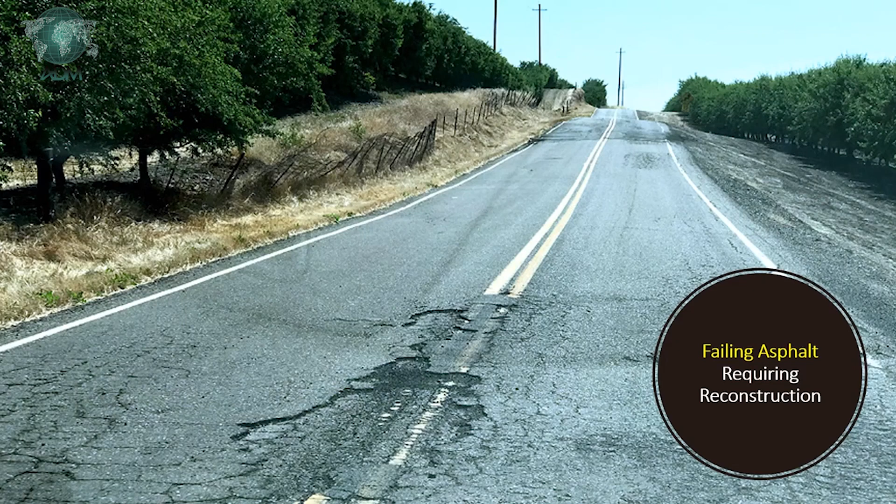I'm sure you've observed that much of our country's roadways are falling apart. You likely have failing roads in your own community. Roads across the country look and drive like the one shown. The truth is that most road departments, whether they be state, county, or city, are dealing with too many failing roads for their budgets to maintain.

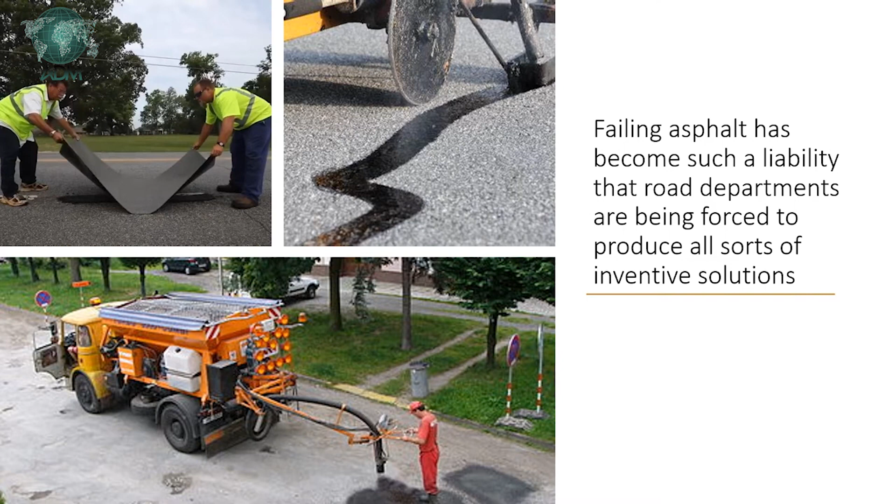In fact, America's roadways are so poor that the American Society of Civil Engineers has scored the U.S. infrastructure with a D. Failing asphalt has become such a liability that road departments are being forced to produce all sorts of inventive solutions to deal with potholes, cracks, and other types of failures.

Prior to LithTec, road departments have had two options to replace their failing asphalt. The first option is called unpaving. Unpaving is literally returning asphalt roads into dirt roads. Unpaving results in poor drive quality, regular maintenance that can cost as much as $12,000 per mile per year. It requires reconstruction due to loss of base course every 3 to 5 years, and when weather conditions are poor, it results in unsafe driving conditions.

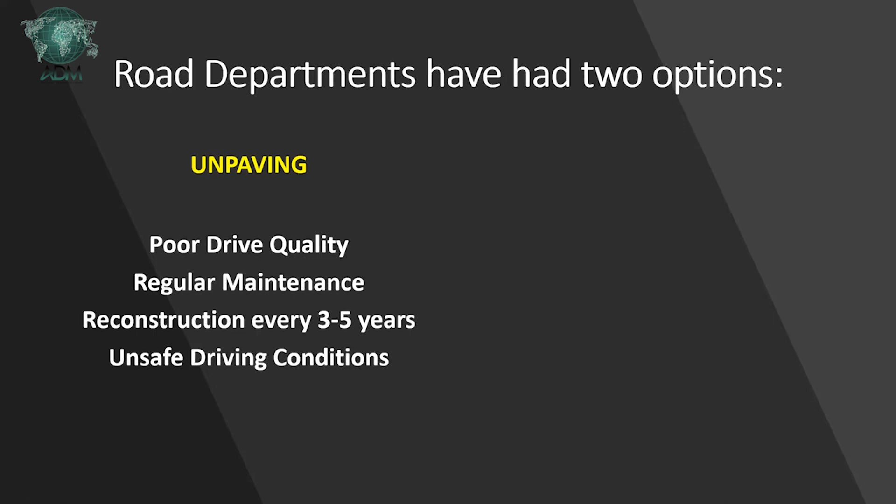Due to limited budgets, unpaving conferences are being held across the nation in an effort to turn asphalt roadways back to gravel roadways. At Lithified Technologies, we believe that unpaving is simply not good enough, and is one of the reasons we've developed LithTec. The second option is asphalt reconstruction.

Asphalt reconstruction has excellent drive quality, very similar to a LithTec roadway. In fact, there are a few examples of a LithTec roadway that turns directly into an asphalt roadway, and drivers are unable to tell any drive quality difference. However, unlike a LithTec roadway, maintenance can be very expensive due to potholing and various types of road fatigue.

Reconstruction can cost as much as $1.2 million to $1.5 million per mile, which is simply too expensive for counties to fit in their limited budgets. This results in counties having more and more failing asphalt to fix each year because they are unable to reconstruct enough miles per year to make up any ground. In addition, asphalt reconstruction has severe environmental impact as it requires large quantities of materials.

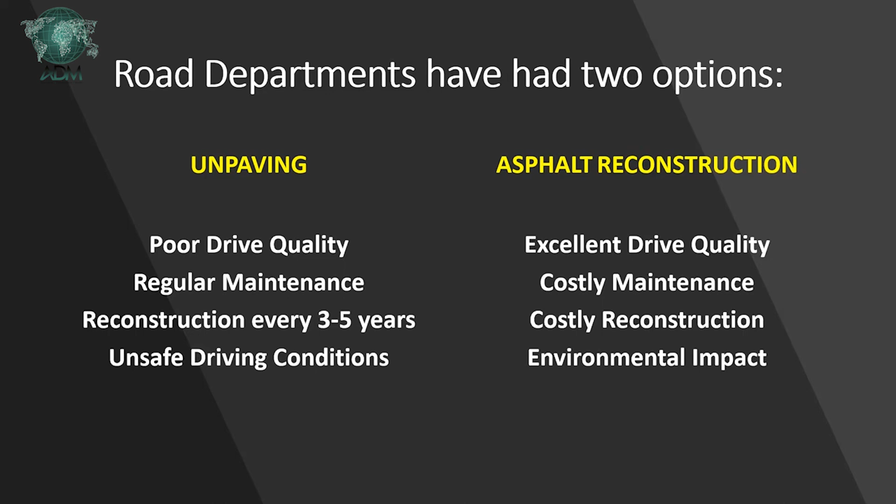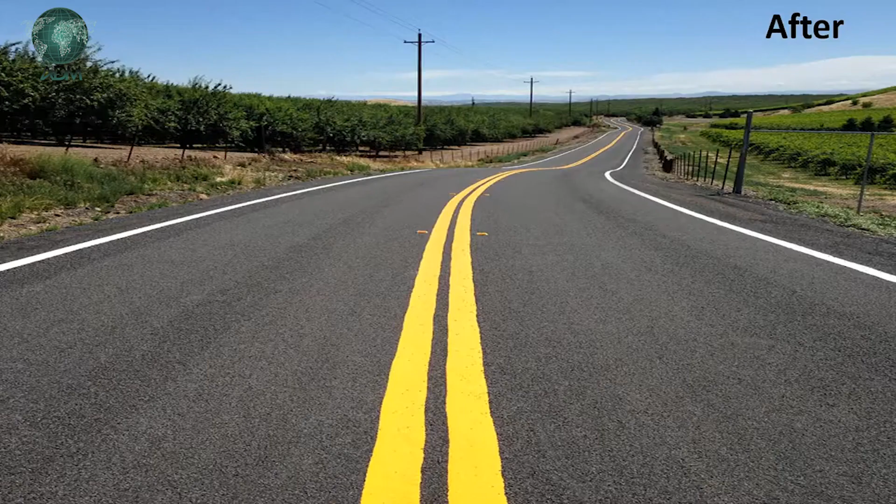At Lithified Technologies, we have made it our mission to provide road departments a third option, a better option, a roadway with asphalt performance that fits in the budget. And that's exactly what we have done. Remember the failing asphalt road I showed you previously? Here it is before a LithTec installation. And here it is after, with a LithTec road foundation and a double chip seal surface striped and finished.

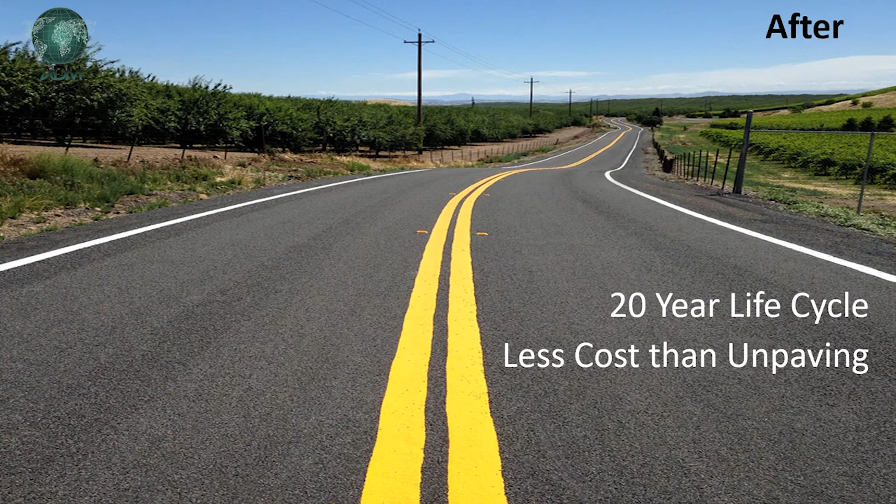This road is a county road built for heavy hauling for a 20-year life cycle. The roadway shown here will cost less than unpaving due to reduced maintenance with far greater drive quality, and will cost as little as 25% of the cost of asphalt reconstruction, allowing counties to construct at least 4 times the miles per year. Achieving 4 times the miles per year for any road department is a big deal. You might be wondering, how is this accomplished? So let's get right into it.

At Lithified Technologies, we have spent the last 8 years developing a technology that we believe will lead to a paradigm shift in the way that road departments choose to build roads. You're probably aware of a natural occurrence called lithification, which is a process involving minerals, moisture, and pressure that combine to form complex aluminosilicates, thereby gradually turning soil into stone over thousands of years.

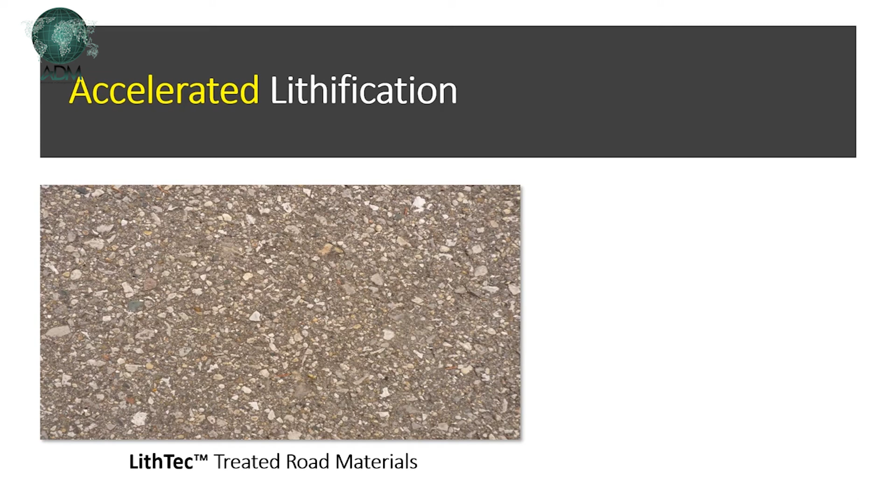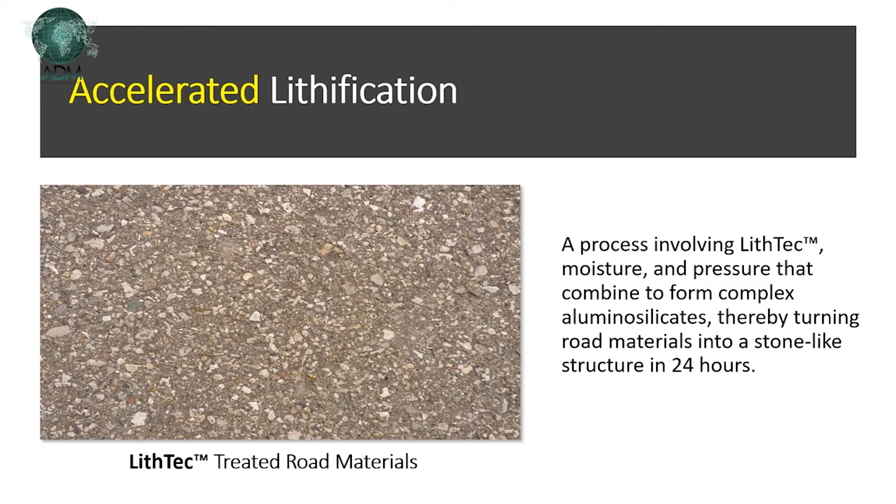LithTec is a breakthrough technology that capitalizes on the natural occurrence of rock formation, but in a faster package. LithTec is able to accomplish accelerated lithification, which is a process involving LithTec, moisture, and pressure that combine to form complex aluminosilicates, thereby turning road materials into a stone-like structure in 24 hours. Accelerated lithification is achieved using LithTec. If you had any questions about precisely what LithTec is, here is a brief summary.

LithTec formulations are dry cementitious blends of traditional elements, along with a proprietary blend with premium components that are uniquely processed. LithTec is blended regionally and is available for shipment across the entirety of the U.S. LithTec is customized for every project to optimize your previously purchased failing roadway materials into a base lift with the highest structural performance achievable. LithTec is safe and easy to install and was designed to plug and play with traditional road construction specifications.

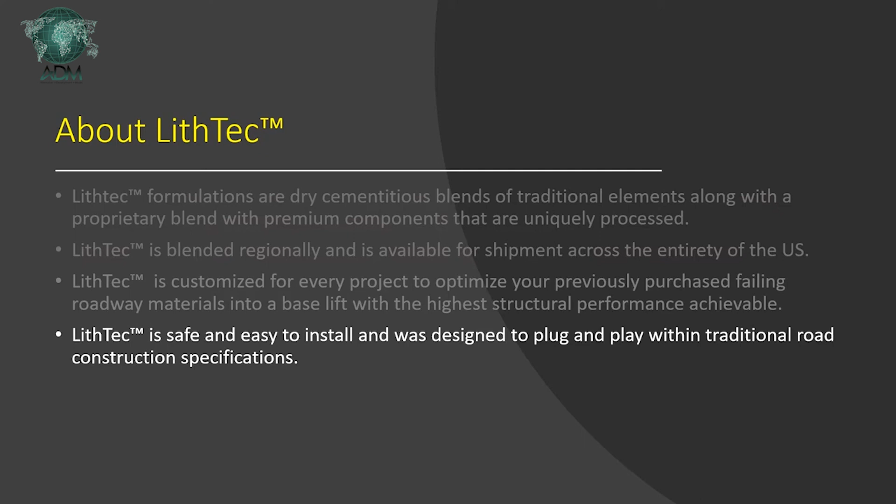Here is a summary of the performance advantages provided through the incorporation of Lithification. Unlike traditional stabilized bases, a LithTec base is capable of sustaining unconfined compressive strengths from 400 psi to 800 psi. This is made possible by LithTec's increased ductility, increased density, reduced porosity, and overall lift matrix characteristics.

Increased strength capabilities correlate to increased stiffness. LithTec often provides resilient modulus values from 500,000 psi up to 2.5 million psi. Due to these values, third-party engineers classify a LithTec base as a semi-rigid pavement with structural numbers up to 0.44.

The result is a base lift that can sustain reduced pavement thickness designs. Ultimately, this creates the opportunity for cost-effective, long-lasting chip seal roadways and reduced asphalt roadways to be constructed in the place of traditional options. LithTec also reduces permeability and porosity, which reduces capillary action, water penetration, and softening due to flooding.

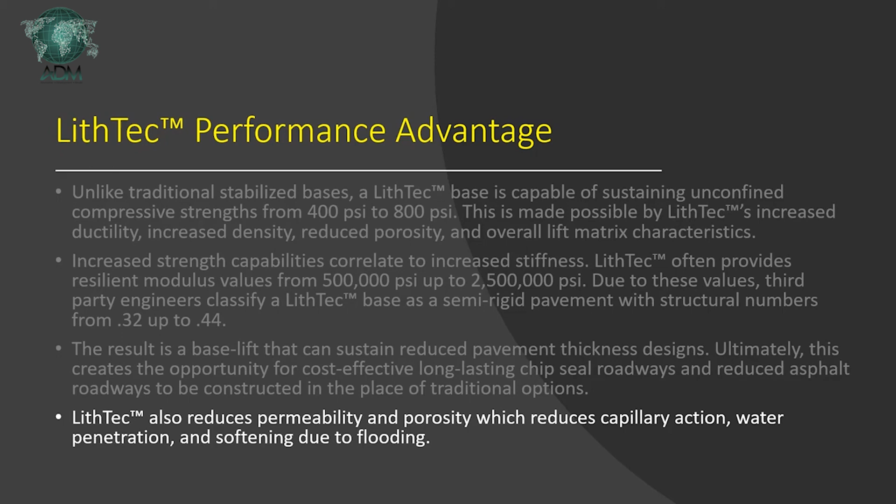To try and help explain how LithTec's performance advantages improve roads, take a look at this illustration. Here is a traditional asphalt construction with a granular base or base course. Base course is unbound, has low stiffness, and is easily degraded by concentrated stress shown here, which results in something you are probably very familiar with: potholes.

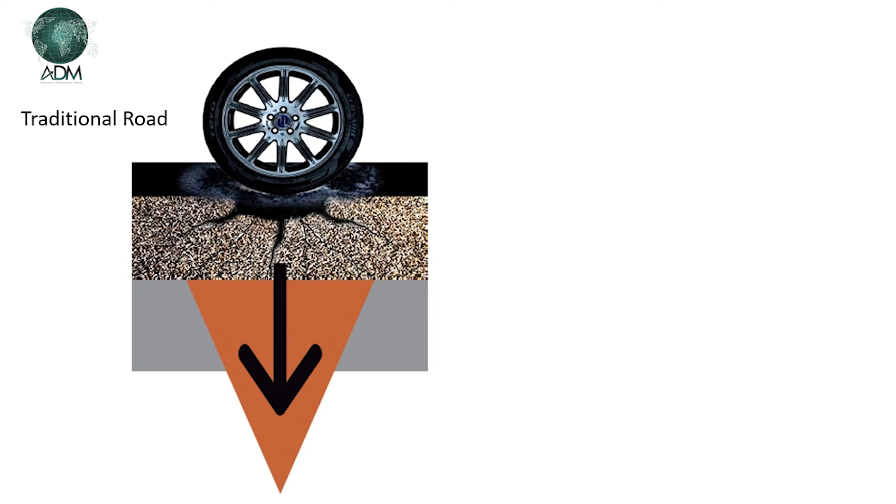A LithTec base provides a bound, uniform, high-stiffness base lift that results in a semi-rigid pavement-like base that distributes the stress, resulting in a long-lasting road with greatly reduced risk of surface failure.

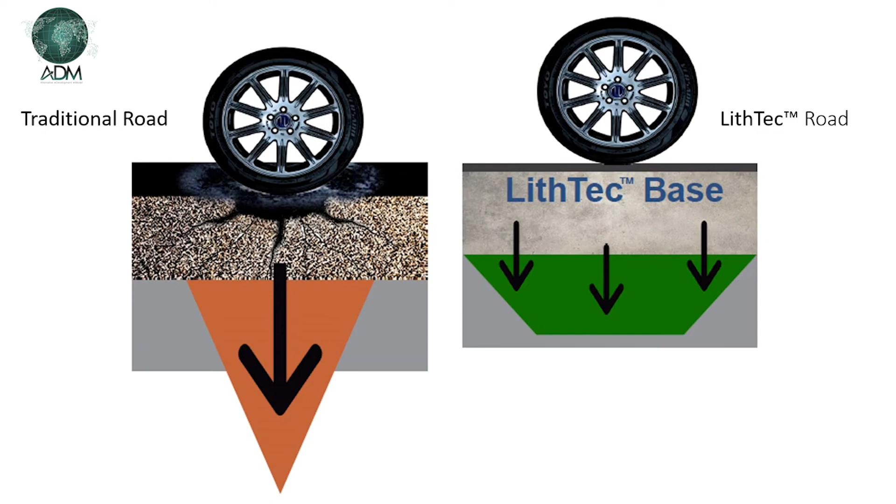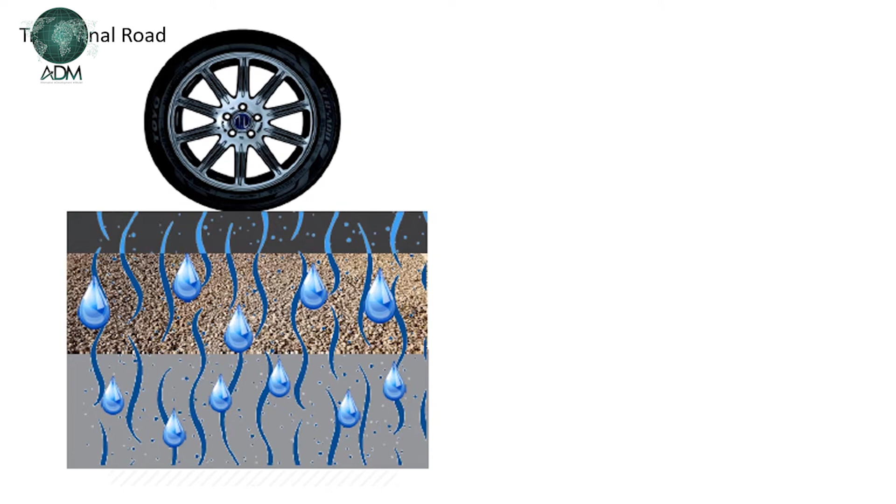Traditional granular base, or base course, is susceptible to high water tables, capillary action, and flooding. Water infiltration will result in softening and poor performance under harsh freeze-thaw conditions, which lead to failure. A LithTec base reduces permeability, helps keep moisture out, remains bound in flood conditions, and reduces porosity, resulting in excellent performance under freeze-thaw conditions.

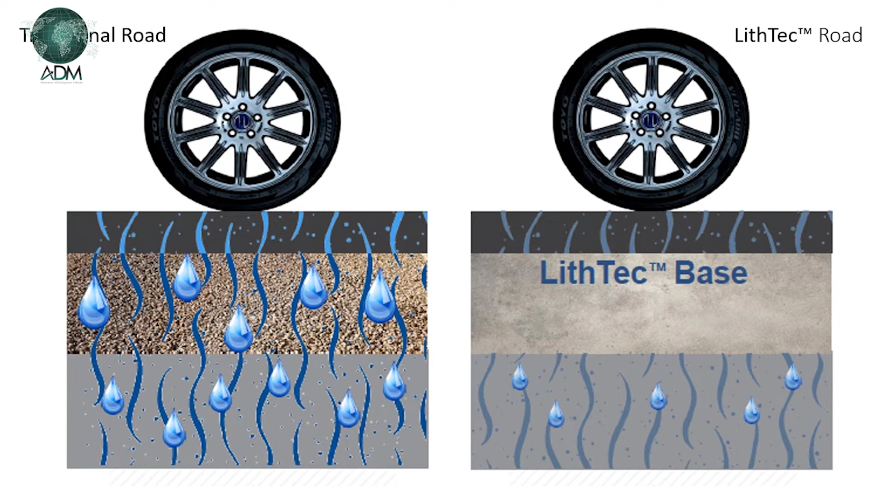LithTec is not simply a breakthrough product. It is also a new way of looking at building roads. Included with your LithTec product purchase, Lithified Technologies provides a responsible road building system by combining LithTec product with included services that support our clients' ensured success. Lithified Technologies provides a great deal of support, and those benefits are provided in stages.

Stage 1 is geotechnical sampling. Geotechnical sampling involves Lithified Technologies field supervisors traveling to your roadway. They will measure the road size, elevations, and evaluate on-site road materials, collecting samples at cross-sections shown here in red, and documenting circumstantial conditions. Field supervisors then send the materials sampled back to Lithified Technologies' geotechnical lab.

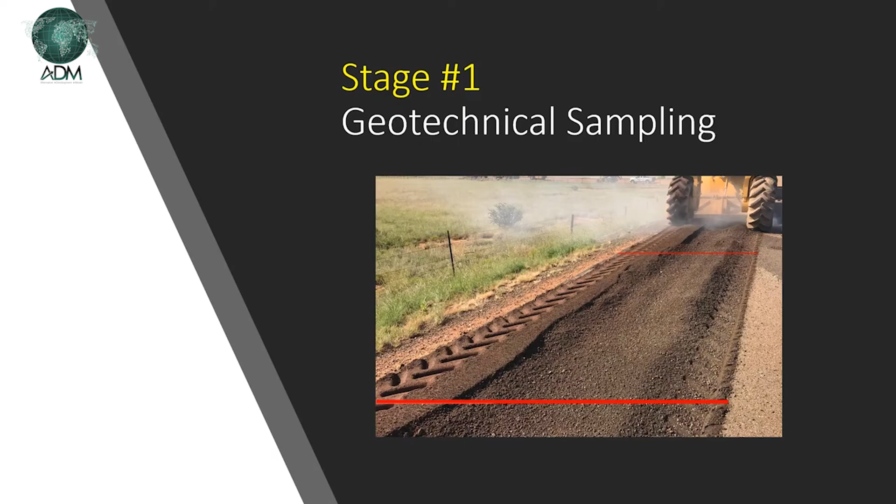Stage 2 involves Lithified geotechnical experts analyzing the road materials sampled on your roadway and completing a proprietary process that allows our geotechs to deliver a customized product with the precise chemistry required to optimize your road performance and road life cycle.

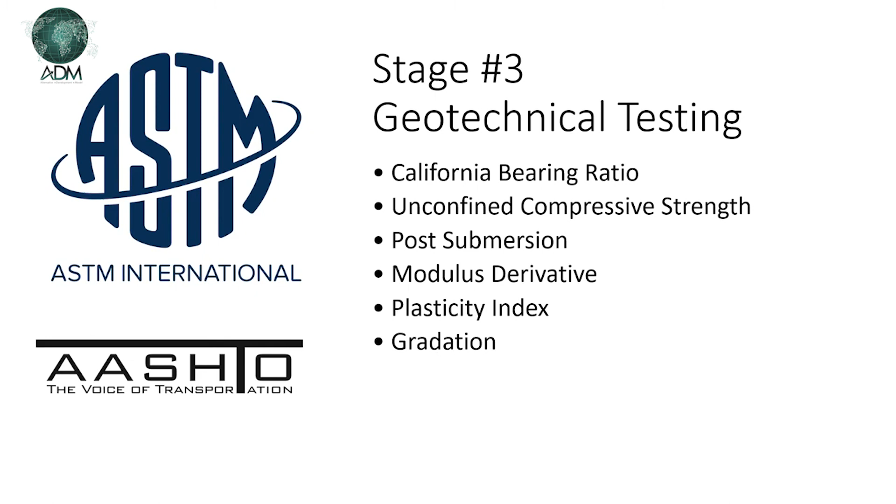Stage 3 involves Lithified Technologies geotechs testing your customized product performance in your roadway materials. Testing includes California bearing ratio, unconfined compressive strength post-submersion, modulus derivative, plasticity index, gradation, dispersion, and shrink swell testing. By testing the road materials with and without LithTec and through many forms of ASTM-compliant testing, Lithified Technologies is able to provide optimal dosage and ensure the structural performance is being achieved to meet the needs of your project.

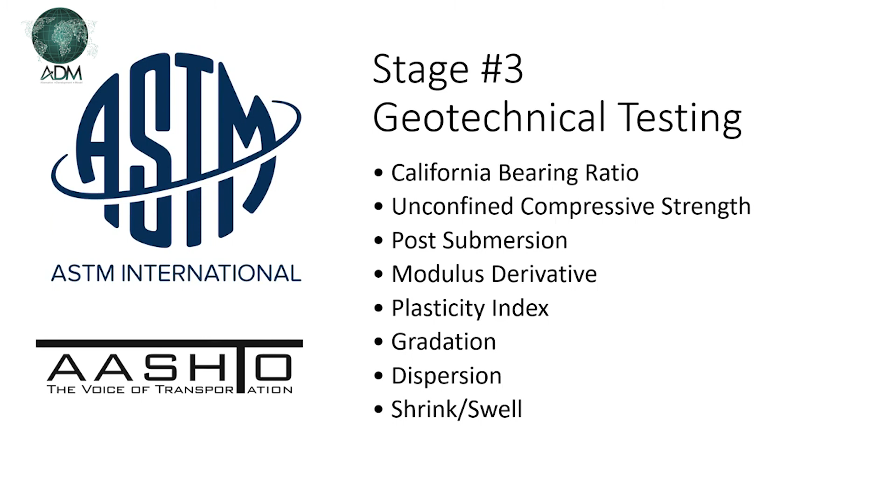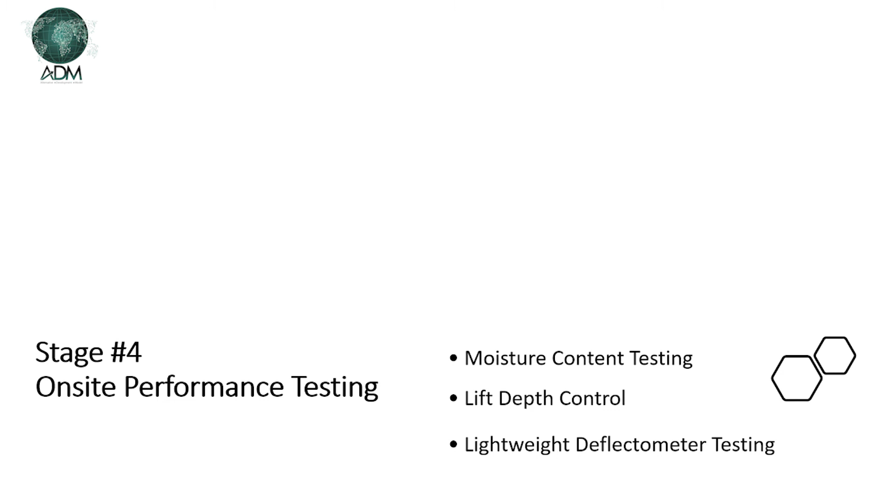Stage 4 includes on-site performance testing during installation. Lithified Technologies field supervisors are sent to your project to assist with moisture control, depth of lift control, and to perform lightweight deflectometer stiffness testing. The lightweight deflectometer testing will be performed at 4-hour and 24-hour segments to ensure that the results being achieved in the field correlate to the results that were achieved in the lab.

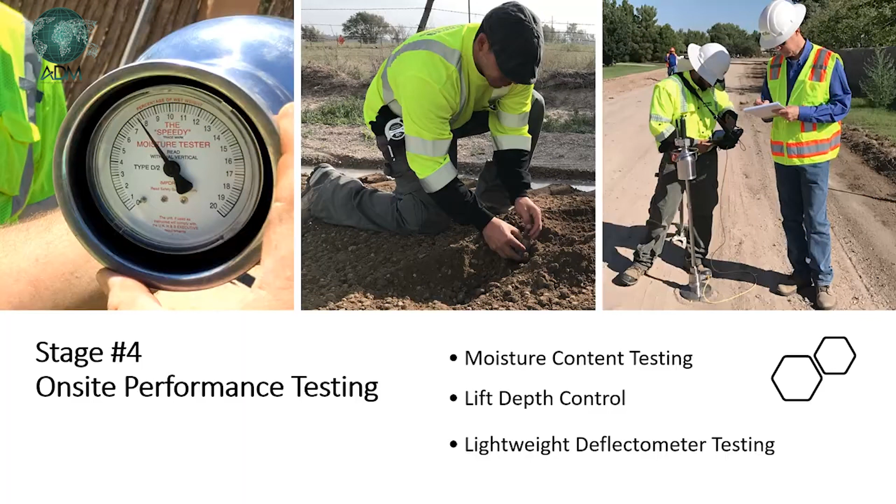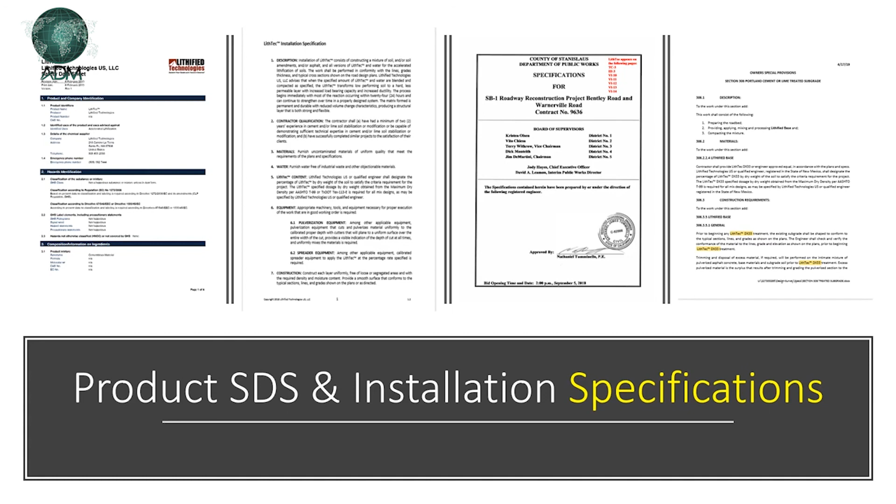LithTec has been included in county installation specifications across the country and is a proven technology with substantial testimonials to help support and build your trust. Los Alamos National Laboratory, otherwise known as LANL, which is the most preeminent scientific laboratory in the world, just completed a 38-page white paper on LithTec and its performance.

They focused on four main attributes: bonding of base materials, unconfined compressive strength and tensile strength, consistency of strength gains, and strength gains across various soil types. They concluded that the combination of these four attributes for the LithTec samples suggests that they are potentially ideal materials for the construction of flexible surface and base layer pavements that can be optimized for local conditions.

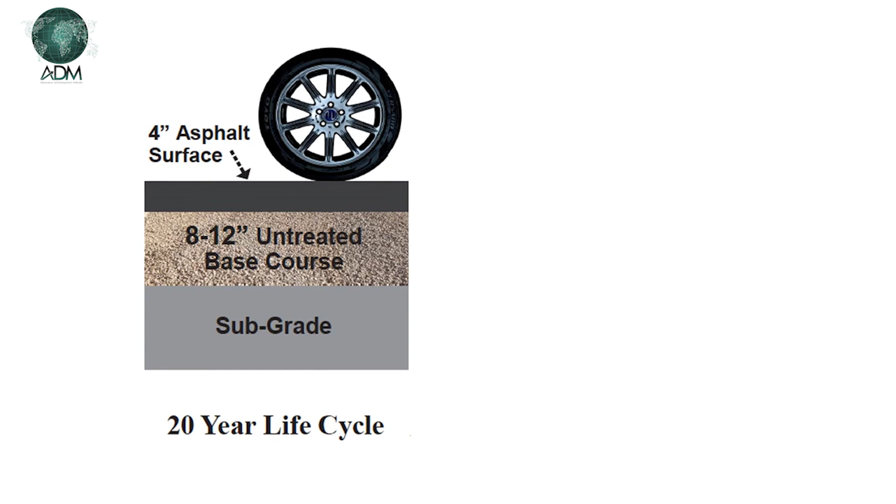Here is an engineered design for a double chip seal supported with a 6-inch LithTec base. Also engineered for a 20-year life cycle. So here is where the rubber meets the road. Traditional asphalt construction costs approximately $1.2 million per mile, while a LithTec base lift with a double chip seal can be constructed for $250,000 per mile. That's a $950,000 savings per mile for the same 20-year life cycle.

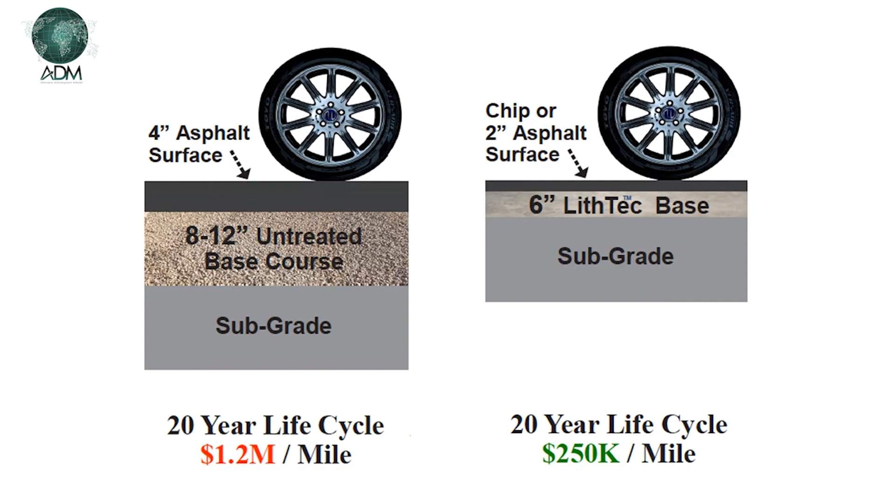Reflective cracking occurs when the base is installed without addressing underlying problems and/or weak spots. LithTec, in concert with the services provided, sampling, product customization, geotechnical testing, and on-site performance testing, were designed to ensure that the risk of weak spots are minimized and thus the risk of reflective cracking is greatly reduced.

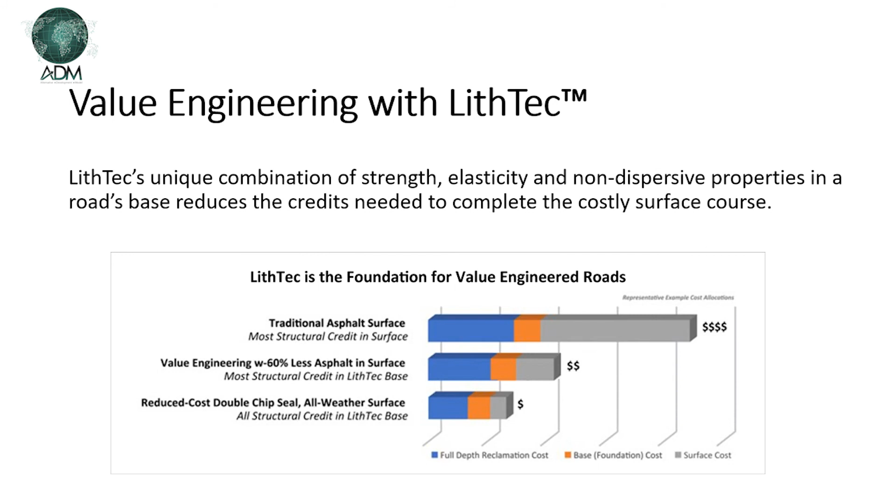You can apply structural credits to the LithTec base, thereby reducing the surface course credits required. In this example, the asphalt is reduced by 60%, and this reduces the overall cost by 37.5%. Costs can be reduced further by utilizing a double pen chip seal for an all-weather asphalt performance road. In this case, the savings in comparison to traditional asphalt reconstruction is 75%. This allows counties to build 4 times the roadway per year.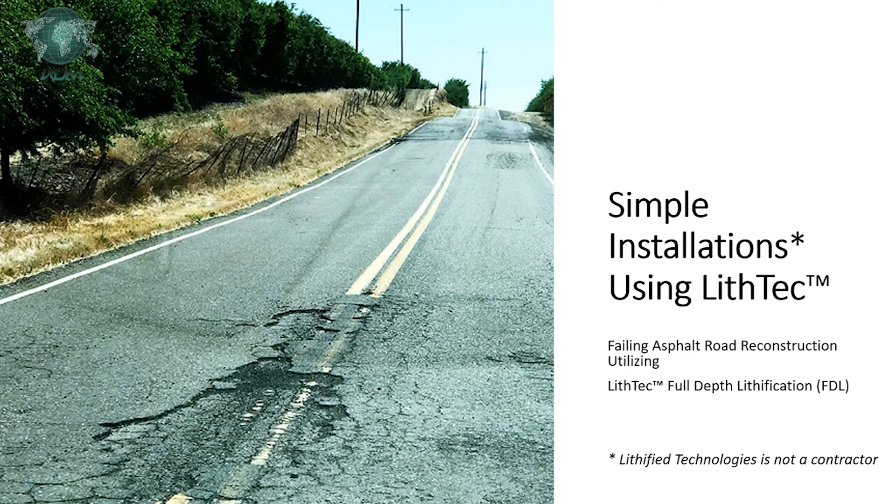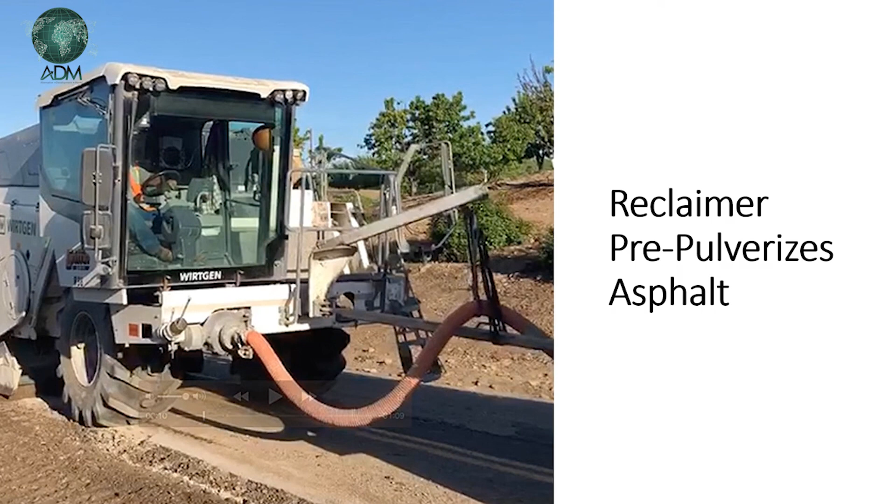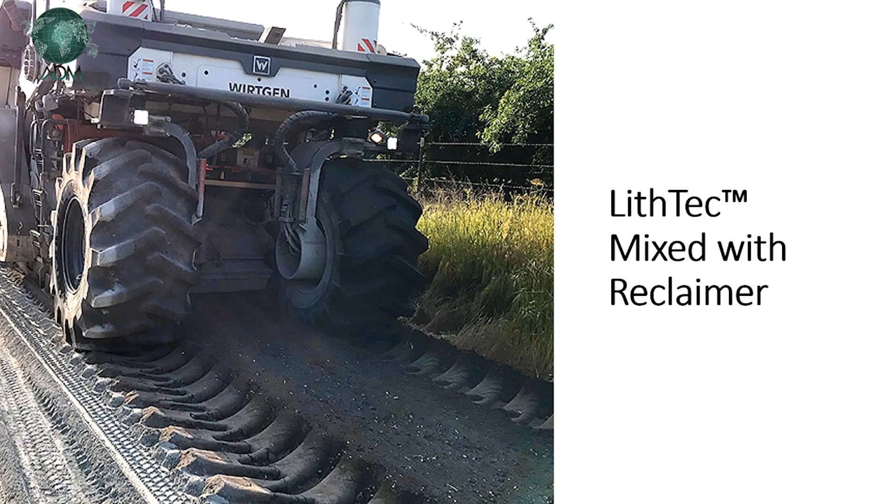Let's now turn to construction and talk about how LithTec is installed. Remember that failing road? Here's how we turn it into a high-performance LithTec roadway. First, the failing asphalt is pre-pulverized with a reclaimer or pulverizer. A spreader truck places the LithTec atop the roadway. LithTec is then mixed to depth into the materials at optimum moisture content and is compacted with a sheep's foot to meet density requirements.

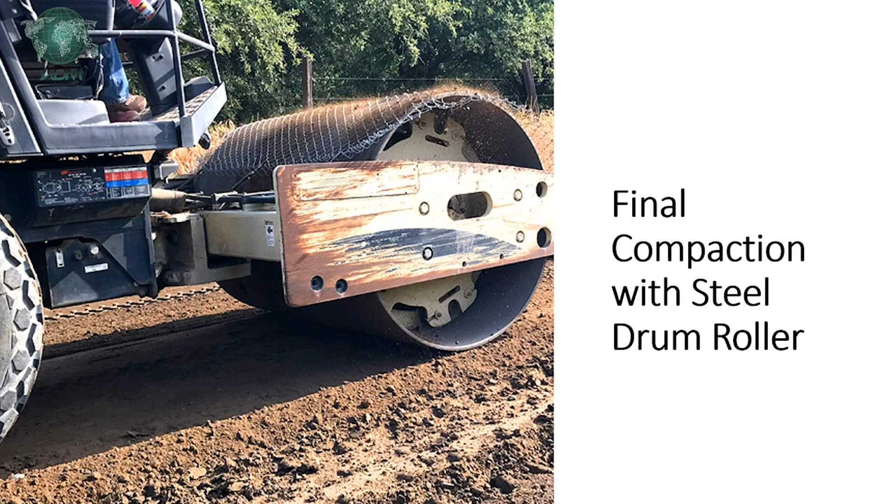The material is shaped and brought to grade, and final compaction is completed with a steel drum roller. Finally, a chip seal surface or reduced thickness asphalt is placed over the LithTec base. The result is a 20-year road installed for a fraction of the cost.

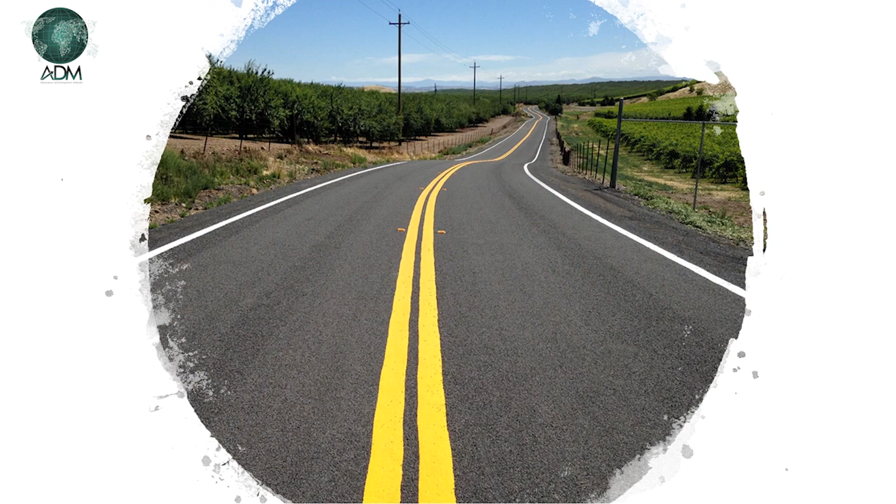At Lithified Technologies, stewardship is a company mission. We help build great roadways, and we also desire to support the ecology and communities where our roads are built. We are happy to report that LithTec passes SPLP testing and therefore does not have any harmful chemicals that leach into the environment.

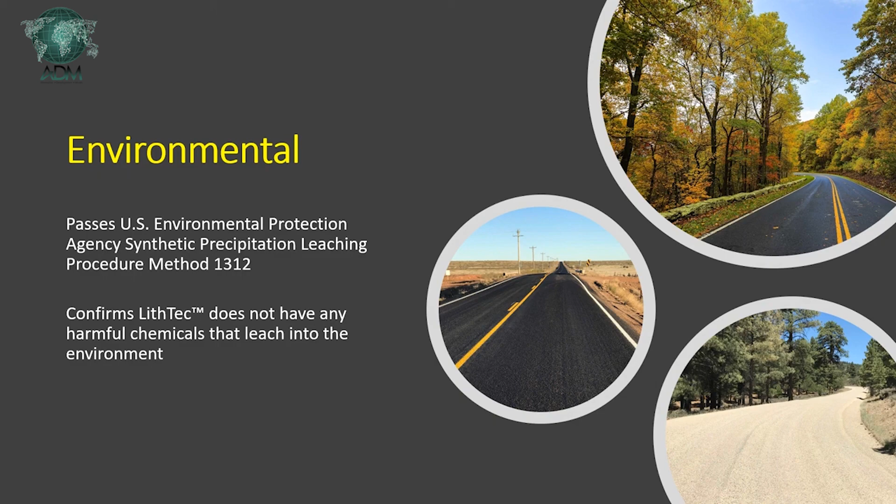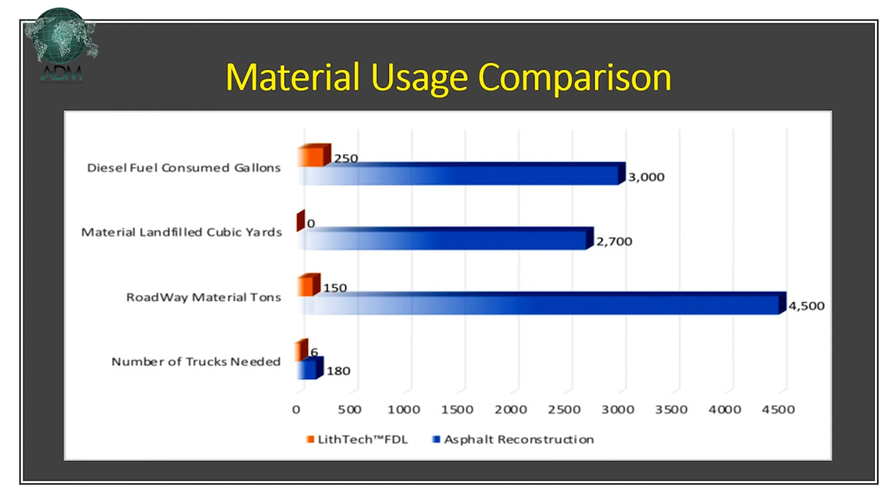LithTec requires none. Asphalt reconstruction requires 4,500 tons of new road materials. LithTec requires only 150 tons. Asphalt reconstruction requires 180 trucks shipped to road site, and LithTec only requires 6. This is a huge savings for road departments and for the environment.